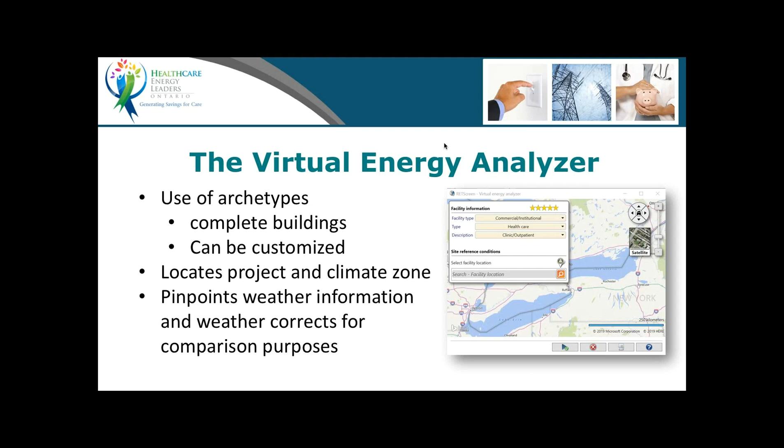In our previous RETScreen webinar, we noted how RETScreen can be used to pinpoint your facility location anywhere in the world. RETScreen can also be used to detail weather data pertaining to that location. There's a whole bunch of NASA weather data loaded into the RETScreen system, and that automatically gets downloaded into your pinpointed location, so you can weather correct your building for benchmarking and other purposes. I just threw in some of these reminder slides so people will see once again what kind of detail you can get out of RETScreen. Next slide, Dan.

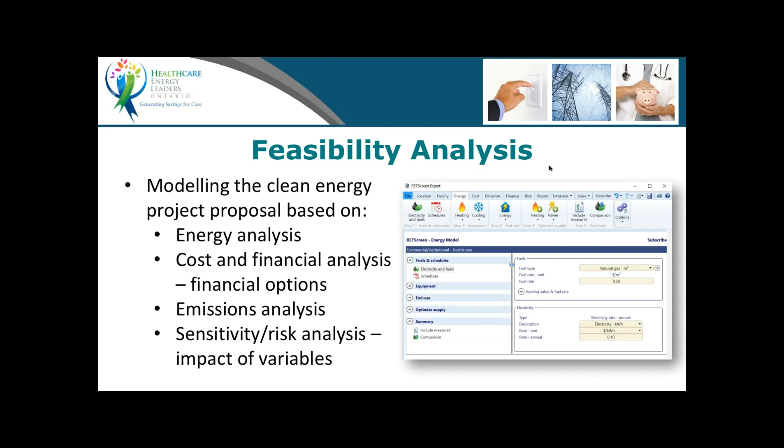So there's also a myriad of ways that through RETScreen you can run financial analysis of a project, from energy to cost to emissions, and a lot of different sensitivity analysis that you can do through the RETScreen tool. It's all there at your fingertips. Next slide.

So building envelope application, in this particular utilization of RETScreen, we had an organization that put out an RFP for a roof replacement. And the specs were open to a number of different types of roof application options, and 4 proposals were received. In order to aid in the valuation for each option, so that the organization knew that they were getting the best bang for the buck, the different systems and R values, we loaded them into RETScreen, and a financial analysis was completed for each.

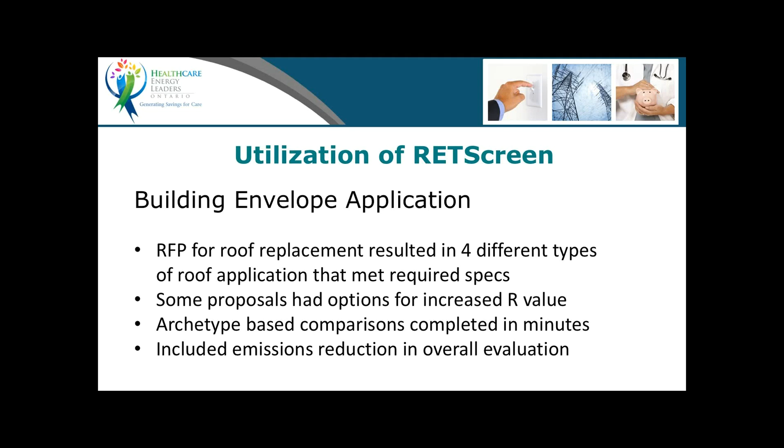And the resulting numbers certainly help the organization make a very educated choice on what roof application they should consider above others. So I thought I'd throw that in there because a lot of us run into these building envelope applications, and RETScreen is certainly a good tool for analysis of different building envelope options. Next screen, Dan.

And as per our last webinar, we also stressed the standardized process and validated methodologies used within the RETScreen program. And this is good because this really helps the facility folks zero in on what projects have more potential for success than others. And we all know that those successful projects lead to funds for further projects. And it's great to have this tool to help us prioritize projects, especially when it comes to budget time.

You know, and I know that when it comes to budget time, we all have this great list of projects in front of us, but with limited funds, we can't do them all. So it's good to have something to help us look at what projects might be more successful and prioritize those specific projects. Next slide, Dan.

So this project comes to us from Peterborough Regional Health Center, and it's an interesting project in which the folks at Peterborough utilized RETScreen to reconcile numbers that were derived through a consultant and which applied to a lighting replacement and control project. And the consultant's report, of course, was many, many pages long. And so you go through it with a fine-tooth comb with all the detail, or you can load it into RETScreen, and the system replacement proposal basically involved installations of some fairly sophisticated controls, as well as lighting system replacement.

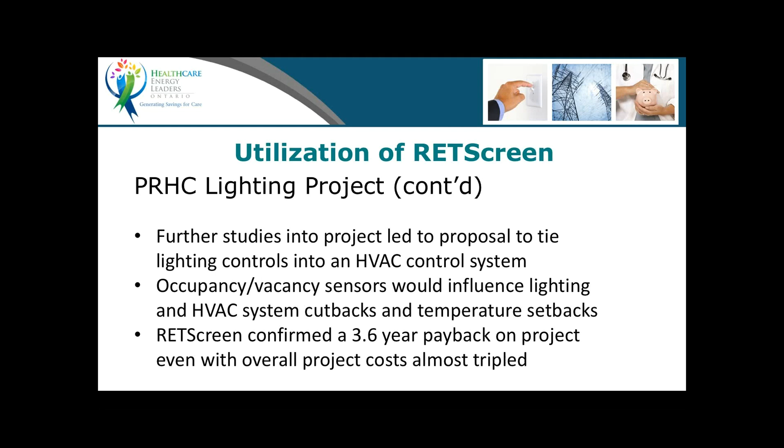But again, RETScreen analysis was completed on this portion of the project, and the total project now showed a payback of 3.6 years. So not much of a difference from the original, which just included the lighting and controls. Now you're putting the HVAC system into the equation and realizing a 3.6-year payback. Not to mention the huge reduction in carbon emissions, which we were able to show through RETScreen. And credit to the Peterborough Regional Health Center folks. This played a big part in the organization's decision to move the project forward. Next slide.

So again, in our last webinar, we talked about RETScreen and persuasion. And RETScreen is a great system when it comes to the ability to graph financial information over time, track project performance over time, and we'll see a great example of that in the next project example. And to speak in terms that the finance folks understand, RETScreen not only calculates payback, return on investment, net present value, cost-benefit calculations, it also cranks those numbers out in a nice-looking report at the touch of a button.

And to me, you know, from the facility side of things, this is a great thing to have at my disposal. You hit a button and out comes a 12-page report that's very polished, and it happens within seconds. Next slide.

So this example, to me, is a brilliant example of the use of RETScreen for energy tracking purposes. This comes to us by way of the folks at Service New Brunswick. The building in question is approximately 10 years old and was built to energy efficient standards. However, it's benchmarking 10 kilowatt hours per square foot higher than the average, and this was a cause for concern for the folks at Service New Brunswick.

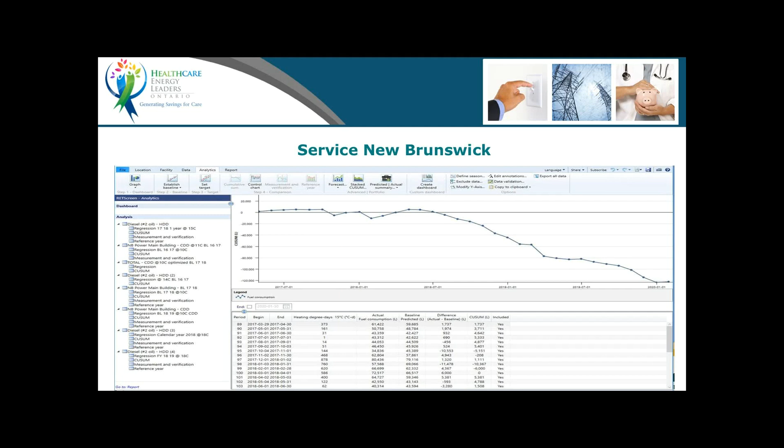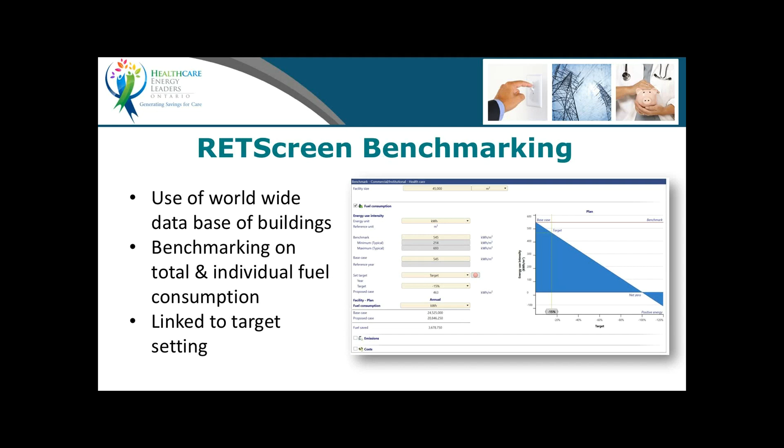Next slide. So I just wanted to note or remind people that RETScreen is a great benchmarking tool. You can put your building into RETScreen and it'll automatically benchmark your building against others around the world, in a weather-corrected fashion. Next slide.

There's also a great degree of interoperability. When I talked to the folks at Service New Brunswick, they love the fact that they could take information or data they had loaded into Portfolio Manager and automatically migrate that into RETScreen. So there's all kinds of ways. If you're tracking energy use in an Excel file, you can also migrate that into RETScreen, and it's all done in a matter of seconds. You don't have to repeatedly take data from here and put it there. Next slide.

And of course, performance analysis is a great tool for tracking building performance as far as facilities go. And as shown on the graphs, there's all kinds of different graphing that you can use through RETScreen. There's cumulative sum, or CUSUM, as well. And you can balance point the impact based on degree days. And there's many, many dashboard and reporting options in RETScreen.

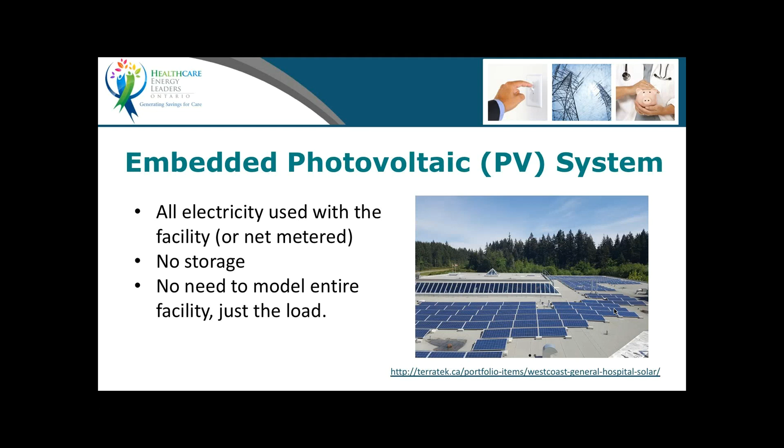This, as pictured here, comes from a hospital out west, and I think the next slide tells us the details of this system. Dan? So on this particular hospital, they use 407 305-watt modules. There was a 100 kilowatt inverter. The cost of the system was about $2.50 a peak watt. And in BC, it turns out that this system would avoid 9.5 tons of CO2.

But in Alberta, if you happen to be there where the fossil fuel presence in the generation mix is a lot higher, it's 130 tons of CO2 avoided. So you could take one of these examples and just transplant it into your province, just like you did earlier, JD, when you talked about the virtual energy analyzer. You can simply move a project that works in one province to a different one and actually see how it works a lot better when it comes to reducing GHGs.

And overall, then, this project has an internal rate of return of 9.6%. In other words, like putting money in the bank at about 10% interest, which I think is a pretty good return. So, Dan, if you want to turn over control to me there, I'll bring the system up and just give folks a look. There we go. All right, you can confirm, Dan, that you can see that? Yeah, so, all good.

So RETScreen is kind of neat. It does a number of things. The thing I really like about it is you can put a picture in when you're doing an analysis, and I always encourage people to document their stuff by putting pictures in. At the bottom of every page, you could actually build a description of this project as you were developing it. So some really cool features like that just make it a lot more usable. So we're able to select the location. This facility, I modeled it after the one in the case study of the hospital in Port Alberni, which was detailed in the reference on that previous slide.

I've seen this in a seniors' home down in Windsor where they had a brick spalling problem and they needed to add cladding on the outside. So the engineer or one of the facility folks there actually came up with a great idea of using a solar wall, because in that particular building they need pressurization air, outside air coming in on a regular basis, and the solar wall was a way to offset the cost of heating that. So in RETScreen, we can model this pretty easily. Dan, if you want to go to the next slide.

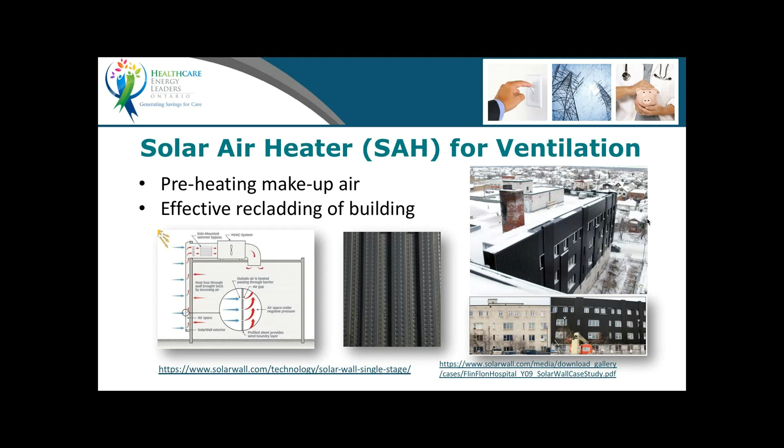And so what I've done here in RETScreen, again, I didn't have as much data on this particular hospital, but I simulated a system where we're bringing 6,000 CFM of outside air, and we have a requirement internally of 22 degrees C air 24/7. That required a 3,800 square foot solar wall, which actually did come from the case study. And in the case of Flin Flon, I believe it was running on number 2 oil, diesel oil and boilers, so 59 tons of CO2 was the result.

But in fact, if you were doing this in a hospital heated by natural gas, you'd probably have a lower CO2 reduction, obviously, because there's less carbon in natural gas. And this one had a really interesting IRR, internal rate of return, or effective interest rate of 17.5%. Dan, if you'd like to switch over for me, and I'll just give people a quick view of how we do this in RETScreen. I guess I have to accept that at some point. There we go. Thank you, Dan.

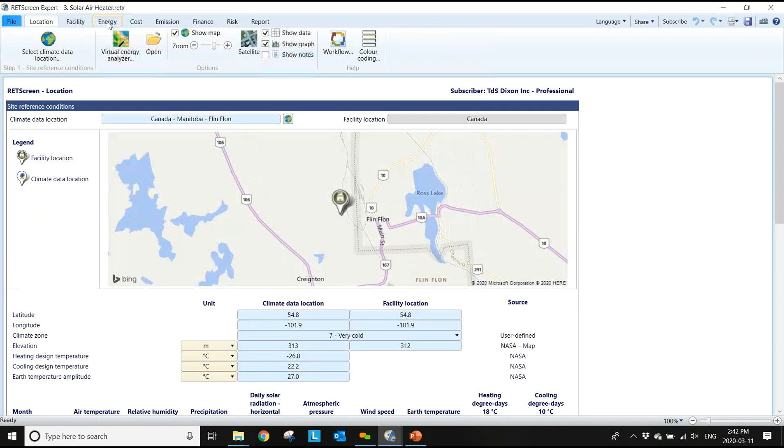All right. So again, I've got my picture in here, which I grabbed from the case study that we were simulating here. Here my location is Flin Flon, Manitoba, so I'm using the actual information from Flin Flon in terms of the solar radiation that's there and the outside temperatures and so on. So these aren't just a rough, crude approximation. It's a pretty nice little simulation we're using here. This is daily solar radiation on a horizontal surface, but wait a second, aren't we on a vertical surface?

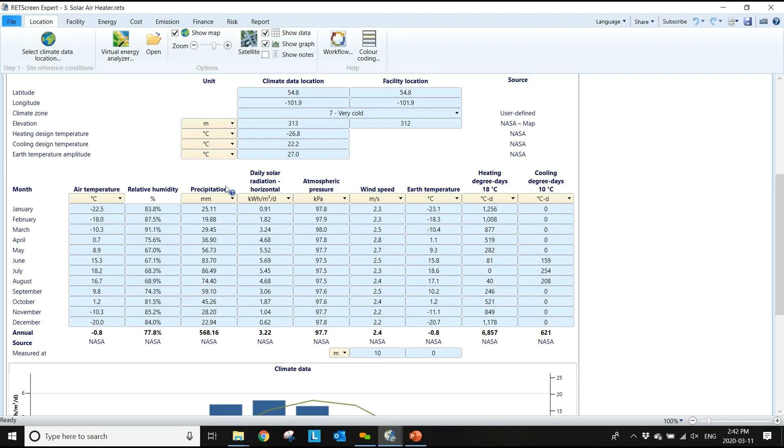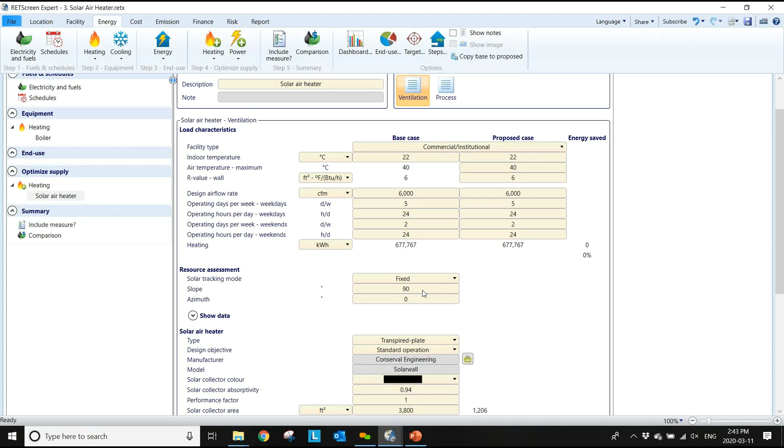RETScreen has the capability, no matter what you're doing, when we go into our energy analysis and into our solar air heater, to tell it what the slope with respect to the horizontal is, and what the azimuth, that is the angle with respect to south, is, and whether it's fixed or tracking. RETScreen then adjusts that solar radiation resource for the particular situation quite adeptly.

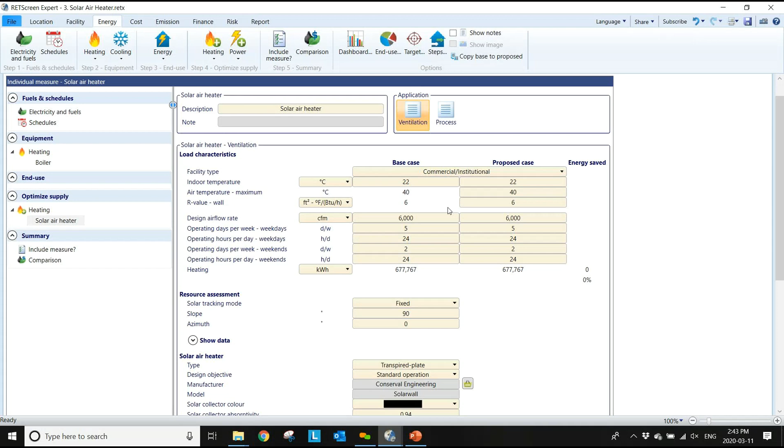The effect of putting that on also marginally improves the R value of the wall itself. In the case of that hospital, I didn't know what their R value was, but I looked at that older building and put an R6 in there. This will marginally improve that relatively low R value, in addition to heating that air at 6,000 CFM coming in during sunny times.

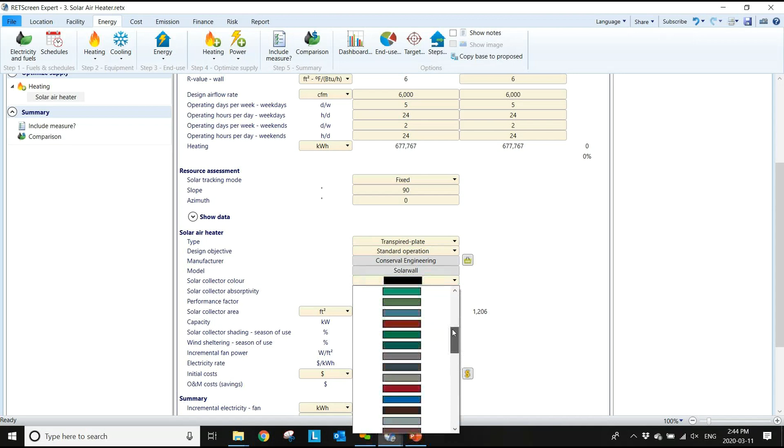Again, we have a database where we can pull up the characteristics of the solar wall or solar air heater. I'm using the term solar wall in that case, which is a brand, part of Conserval Engineering's product, but the generic name is solar air heater. It allows me to select a color. If I wanted to use a different color on this facility, I could, with some marginal effects on performance—not as much as you might think—but it allows us to adjust for the color of the wall, because not everybody wants a black wall on their building.

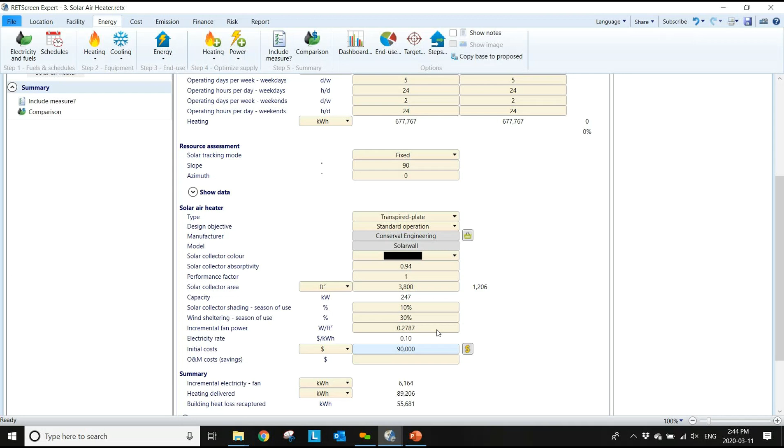The area of the wall, whether there's some solar shading, whether it's sheltered from the wind—because if not, its performance is going to be lower. We can also account for the fact that because this creates an additional delta P or pressure drop drawing air through it, there's some incremental fan power, so we take that into account as well. We have the cost of the wall, and ultimately the amount of energy in the base and proposed cases.

Now it says boiler here. What it's asking is, what heating system are we using traditionally to do this? So in addition to entering the 6,000 CFM we draw into the building, we also have to enter the actual heating system used to heat the air in the base case. That's a boiler, in this case a diesel boiler, or a number 2 oil-fired boiler with a 65% seasonal efficiency, which isn't great, but considering all the things that happen in a plant like that, it's probably not unrealistic.

So again, we can look at our emission analysis. Here we have 60 tons of CO2 when it's in Manitoba, but really it's not so much the province now in terms of electricity that comes into play here, it's the fuel that's being used. So in order to get more or less savings here, I would have to use a boiler in my base case which uses a different fuel.

If I were to flip this over, I can't do that here because I don't have it set up, but if I were to go back and specify that we're using natural gas instead—there we go, I'll flip that in here—and go to my boiler, it will automatically assume the natural gas. Going to my emissions, we've now seen that we're down at 39 tons of CO2 because we're running a natural gas boiler as opposed to a number 2 oil-fired boiler.

Still a pretty good project from the point of view of greenhouse gas emission reductions. I'm just going to go back and set my project back to number 2 oil to make sure my financials come out correct. Number 2 oil, per—I believe I had it per liter.

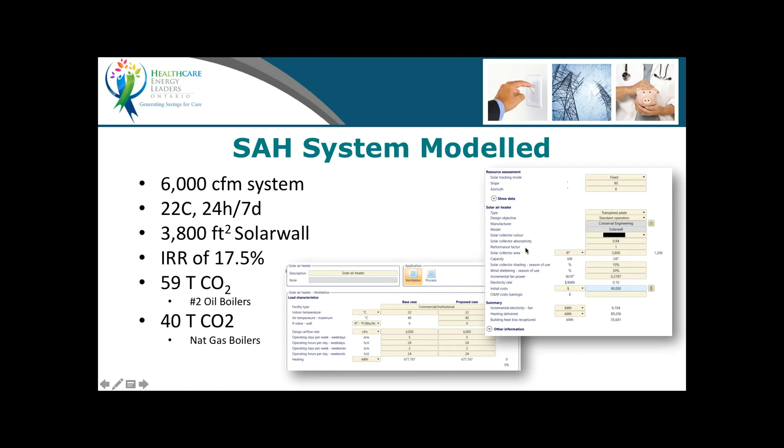So the next system we're going to look at is the geothermal, or what's otherwise known as the ground source heat pump. In this situation, as many of you know, we could do an air source heat pump here as well. The only thing we would really have to change would be the cost and the COP, or coefficient of performance. The COP is the number of units of heat we can pull from the ground, or from the air if air source, for every unit of electricity purchased on average across the heating or cooling season. We'll have a different COP for each.

This type of system typically, because it's a lower temperature system, works better with more efficient buildings, ones with lower loads. The new building is definitely a good example of this.

One of the things I discovered when I was looking around for a case study on this one was an amazing quote from the folks in Quebec, referencing a Quebec City hospital. What they said was, it's much cheaper to recover internal heat versus digging in the ground to reach the heat in the soil. So we took as much advantage as possible of the existing energy in the building.

This comes back to what I was talking about before: waste, efficiency, then supply, but before renewables, considering recovery. RETScreen, in many cases, there's probably a dozen different ways to look at recovery of energy on your ventilation, hot water systems, and so on. So again, you can reduce your conventional load through heat recovery before you consider geothermal or other types of renewable sources. I just wanted to emphasize that fact. Getting the order right allows us to build the most cost-effective solutions, but at the same time the greenest solutions as well.

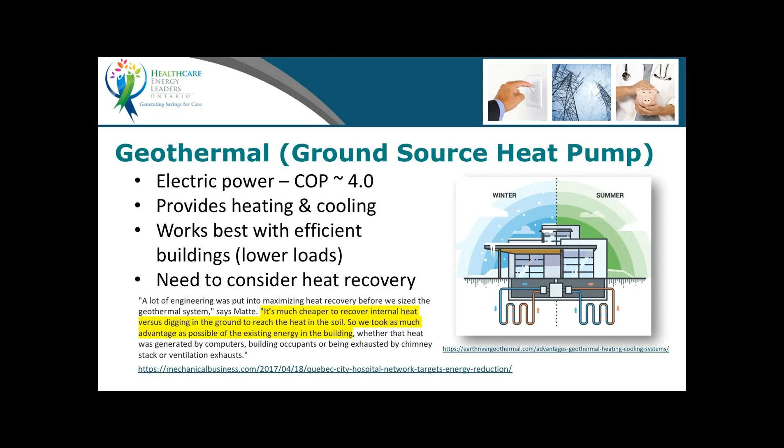Dan, the next slide there. I can introduce this example. Now, for this one, I didn't actually have a building I felt comfortable modeling from a case study, so I created a little 1,500 square meter clinic.

I'm going to basically start with a base case of gas heating, electric cooling, and then move to an electric ground source heat pump, where I'm providing the heating and cooling from electricity via a heat pump, or a traditional air conditioner in the summer. A heat pump can reverse itself and provide cooling in the summer and heating in the winter. In this case, the IRR is about 8.5%, a little lower than the previous one, but still, because we're moving from gas to electricity—electrification—37 tons of CO2 are avoided.

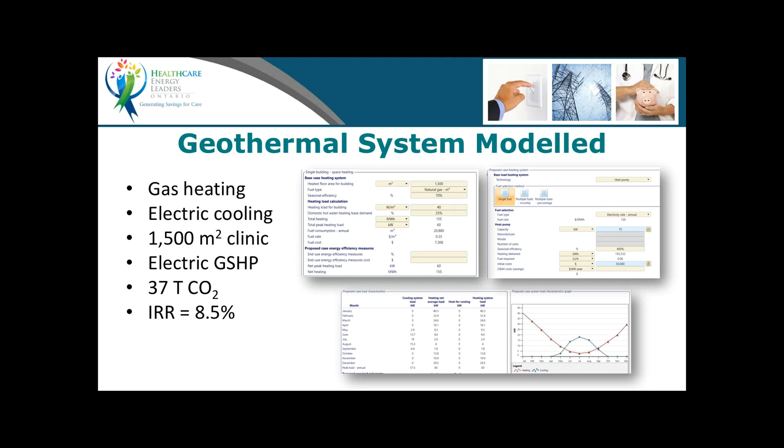So, Dan, if you want to flip me over, and I'm going to make sure I get to the right one here.

So I'm not sure where this building is, but I thought that looked like a little 15,000 square foot clinic somewhere in the country. Again, I can specify my location - I think I've placed this one close to Algonquin Park, maybe near a little town called Combermere. So we can place our pin wherever we want on the map, and build our project.

In this case, we're going to be using the combined heating and cooling model in RETScreen. It allows us to look at cogen systems, combined heat and power systems that provide heating, cooling and power, but also allows us to look at converting a building from traditional electric air conditioning and gas heating over to a situation where we're using a heat pump for both purposes.

So we start off with our system selection, which is this picture here. We specify the cost of our purchased fuels, natural gas and electricity. We can then specify our base case heating load - in this case, natural gas with 70% efficiency, and I specify the heating load for the building.

This is kind of an end run around doing a lot of the building simulation calculations - 40 watts per square meter heating load. And if you're using RETScreen and wondering what that would be, you can simply click in here and get some really cool help in terms of understanding what the design heat load for your building is based on insulation levels and design temperatures. So some very useful assistance there.

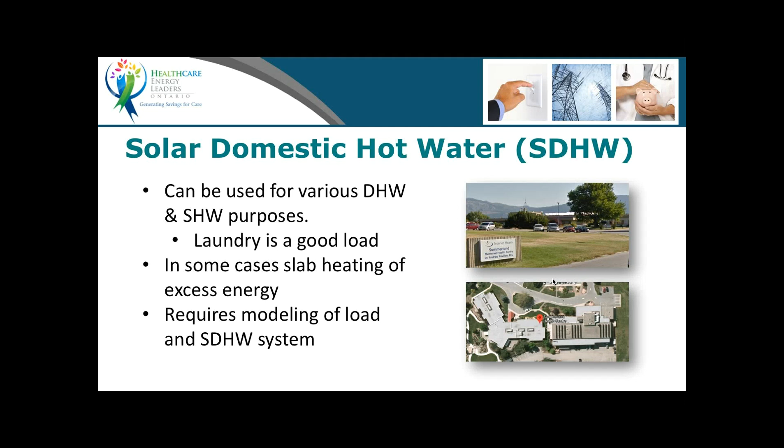There we go. Okay, so the final system that we're going to look at is a solar domestic hot water system. So this is a fairly traditional type of solar system, one that's used for heating hot water. And again, this is kind of like an embedded system, just like the PV one was before. I actually modeled this one on the basis of a case study that I found from out west in Summerland in BC, which is a fairly sunny place, which would make sense. But I've seen these systems work in less sunny places as well. So next slide there, Dan.

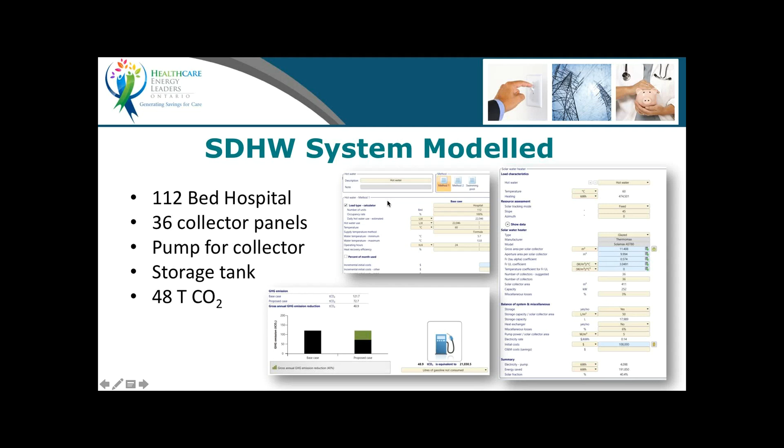So it's a 112-bed hospital, 36 collector panels. There's a pump for the collector, storage tank, and this one actually avoided 48 tons of CO2. So I'm just going to quickly flip back to the RETScreen on this one, Dan. You can give me control again. Should we do this one right here? There we go. Thank you very much, sir.

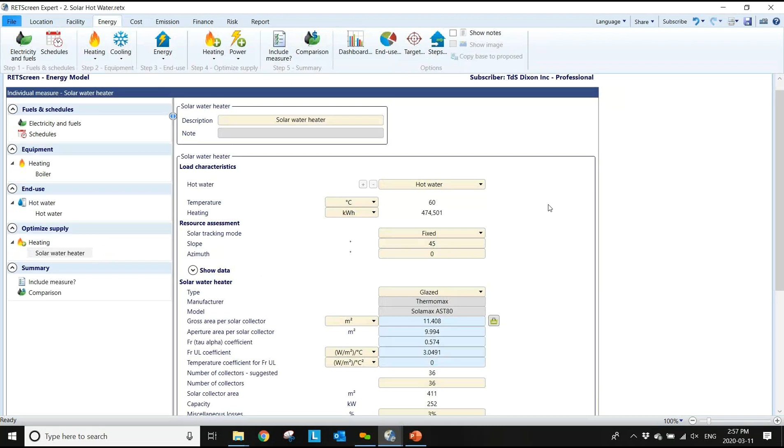All right, so again, here we're using what's called an evacuated tube collector. This is actually fairly efficient, can generate relatively high temperature hot water, but it's not a cheap system by any means. Now, we may have simulated this one a little bit differently. Yeah, so I used the glazed collector in this situation. So again, a 45-degree slope, which is appropriate for that location. Some information drawn from the database. All this blue data comes out of the database. So if you can use that database in RETScreen, it's going to save you a lot of time digging up information. I fill a bit more information in.

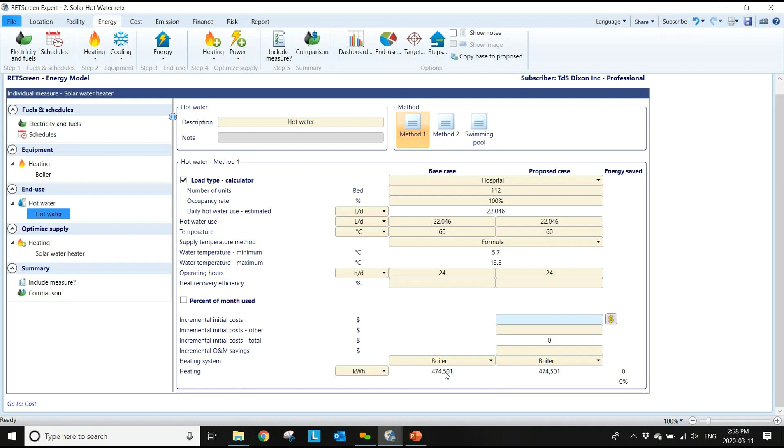It'll actually suggest to me, in order to meet the load I have here, the load being, well, what was the load? Well, it says 60 degrees C water. Right, well, where did that come from? Well, if I go over here to my hot water model, here I can actually specify a 112-bed hospital. It suggests that that hospital would use 22,000 liters of water a day, and I can specify the temperature. It takes into account the ground temperature, and the incoming water temperature changes from time to time, and ultimately we now can actually construct the base case, which is the 474,000 kilowatt hours of water heating. That's heated by a conventional natural gas boiler or hot water heater with a 70% efficiency.

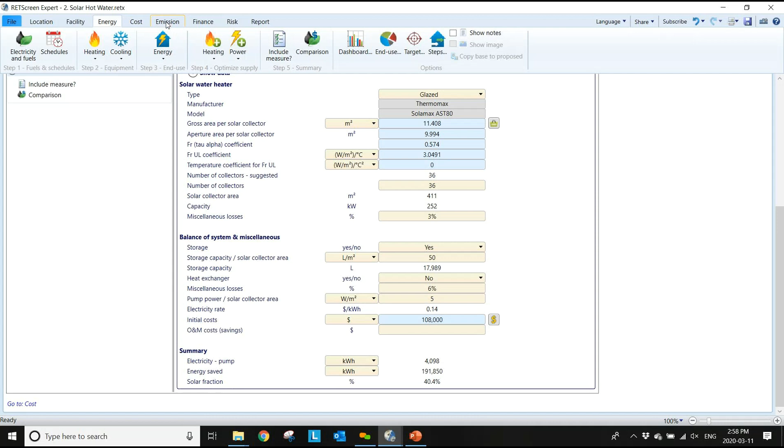And so the solar water heater, through all its details here, now can displace 40%, what's called the solar fraction of 40%. And we've also factored in here the energy required to operate the pump to run the water up to the solar collector as well. So again, we can have a quick look at the emission reductions. That's made a pretty good dent in our emissions, about 50 tons of CO2 in this case. And from a financial standpoint, a longer payback on this one. But nevertheless, if we were looking at getting those emission reductions, that's like taking 9 cars and light trucks off the road through one relatively simple solar system. You can have a look at the case study in that one. It's on the slide when those get sent out.

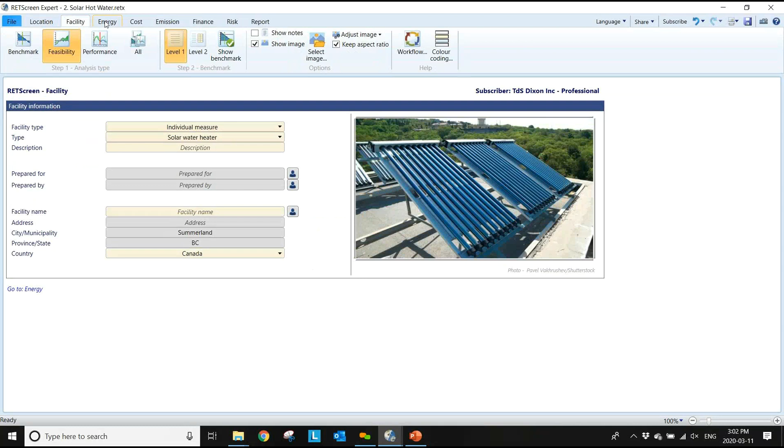Yeah, so RETScreen can be pretty flexible. If you want to flip the screen back over to me there, Dan, quickly, I can just show folks what I would do there. Sure. Okay, accept. So in RETScreen, what you can do in your facility, I'm going to set this one up here. Once I've defined my fuels, I can define my schedules, and I can add schedules for different parts of the facility.

And then once I create a building envelope model, let's say, which is the building envelope in a certain area, I can pick from these other schedules and apply those schedules to the building envelope. If I have ventilation systems that are in particular areas, again, I can pick those schedules. So I can mix and match my different types of end uses with different schedules. And the schedules are flexible so you can specify setback, setup temperatures for heating and cooling, and then a weekly schedule as well.